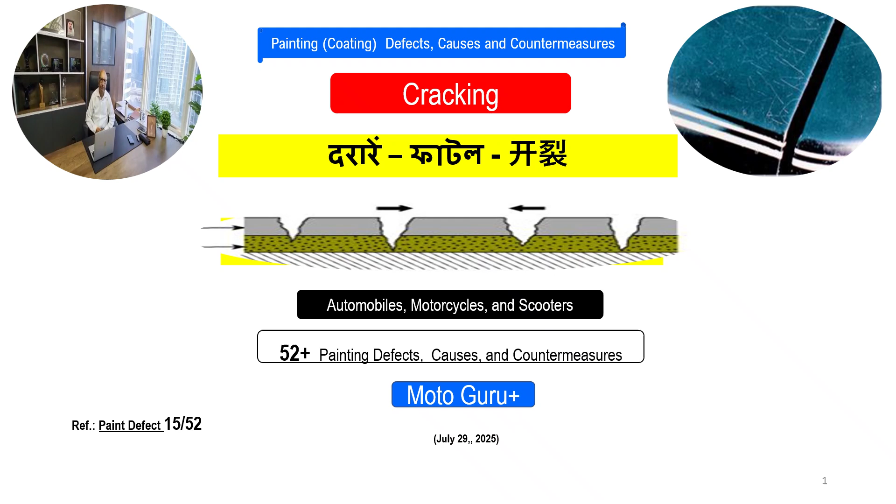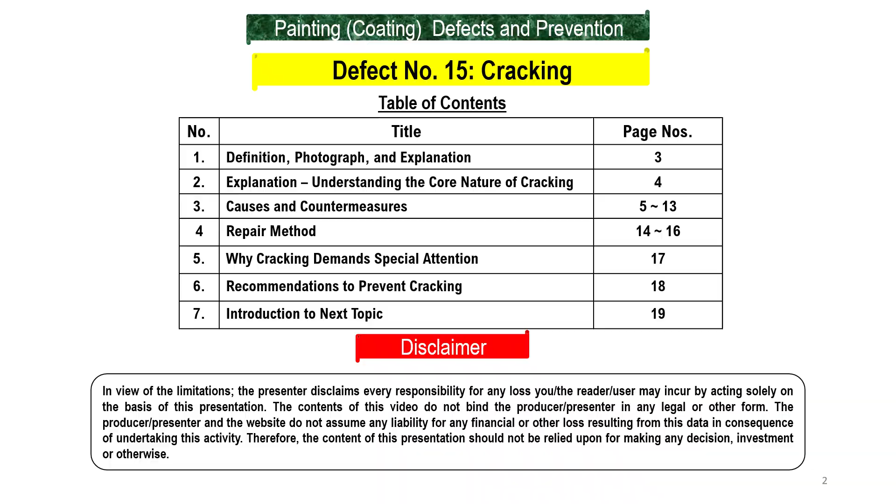Cracking is a surface defect characterized by the formation of visible fissures or breaks in the top coat layer of paint, varying in length and width. These cracks typically resemble dried mud or fractured glass and occur due to the loss of paint film elasticity. Cracking is often a progressive failure originating from underlying issues such as improper curing, excessive film buildup,

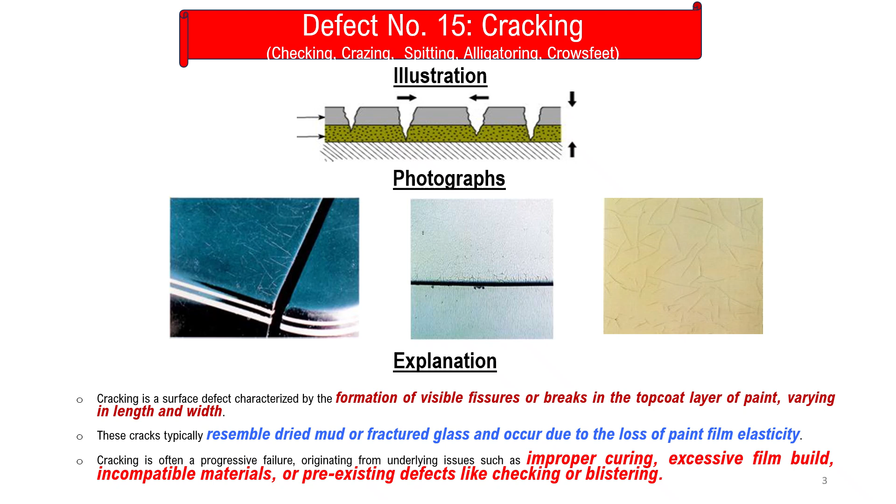incompatible materials, or pre-existing defects like checking or blistering. Cracks are lines of various lengths and widths in the top finish, resembling the cracking of dried mud. It is usually the result of an earlier fault, such as checking or blistering.

The paint defect cracking is one of the most serious and structural failures in automotive coatings. Cracking reflects the loss of elasticity and cohesive strength of the paint film. It is not just a cosmetic issue. It indicates that the paint system has either aged prematurely or was compromised during application. Cracks allow moisture and environmental contaminants to penetrate, leading to corrosion and further delamination.

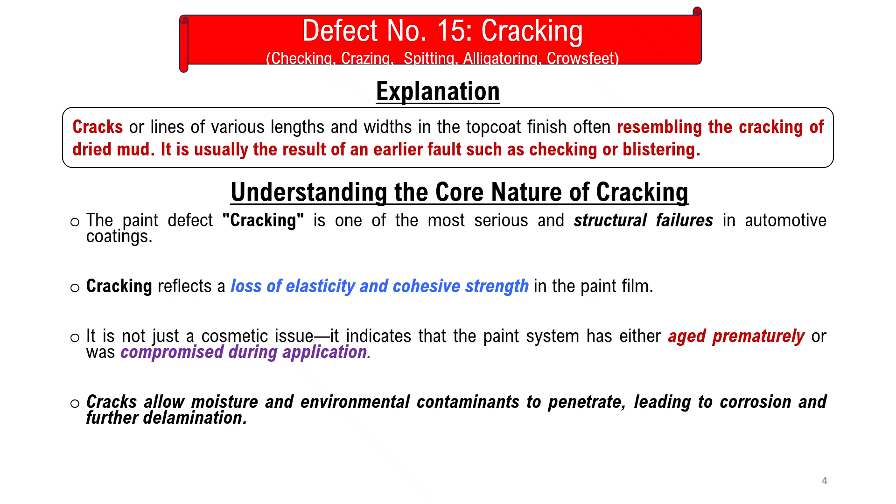Regarding causes and countermeasures, the first and foremost important cause is excessive film buildup, that is excessive film thickness of undercoat and/or top coat. When there is thick film, the thick film layers lose flexibility over time, and therefore they are prone to cracking, especially under temperature stress or vibration. Therefore, we recommend applying coats within specified thickness, following the manufacturer's technical data sheet for number of coats and flash times, and using a wet film gauge to control paint film buildup.

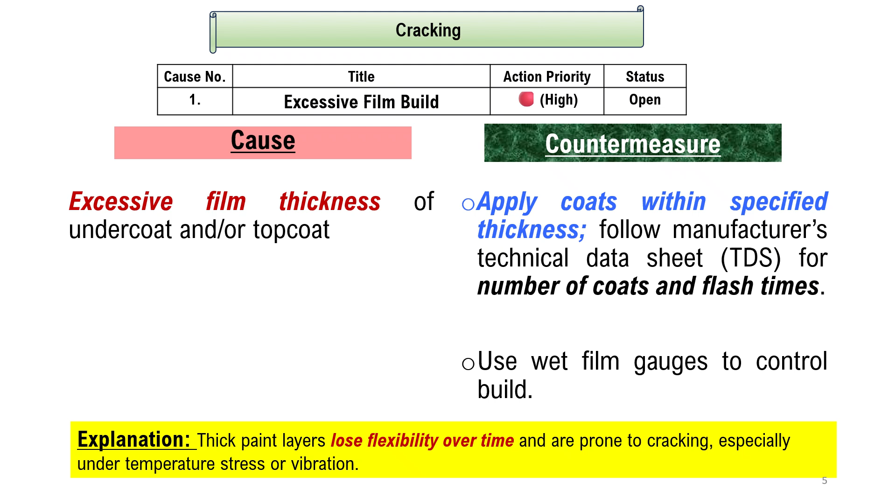Cause number two, a high priority item, could be refinishing over a damaged substrate. Application over previously cracked, crazed, or unstable finishes. Old cracks act as stress concentrators, leading to rapid propagation into the new coating. Therefore, we recommend completely stripping and removing the cracked substrate before refinishing, and checking for stability of existing coatings before proceeding.

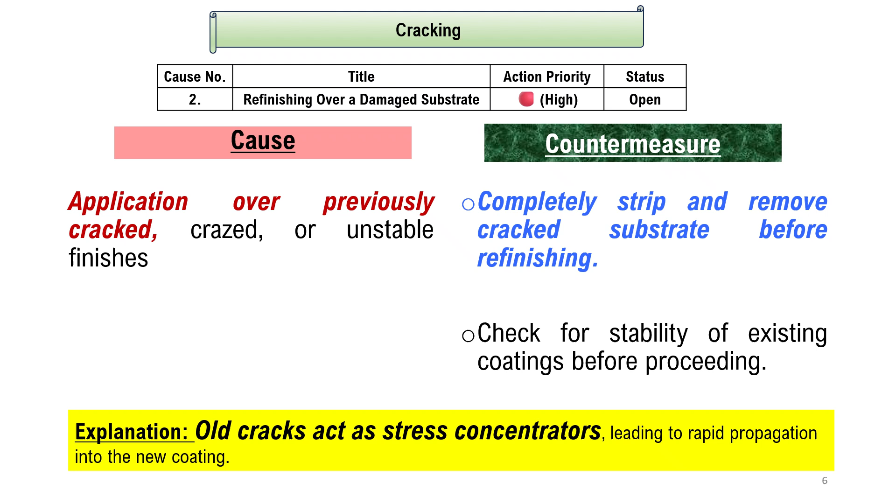The third important probable cause, also a high priority item, could be insufficient flash time, that is, forced drying. Not allowing adequate flash off time between the coats, or drying undercoats with compressed air, etc. In that case, solvents become trapped in lower layers, leading to surface tension and cracks during curing or aging. Therefore, it is recommended to follow correct flash times between the coats, avoid forced air drying from the spray gun, and allow natural evaporation or use controlled booth airflow.

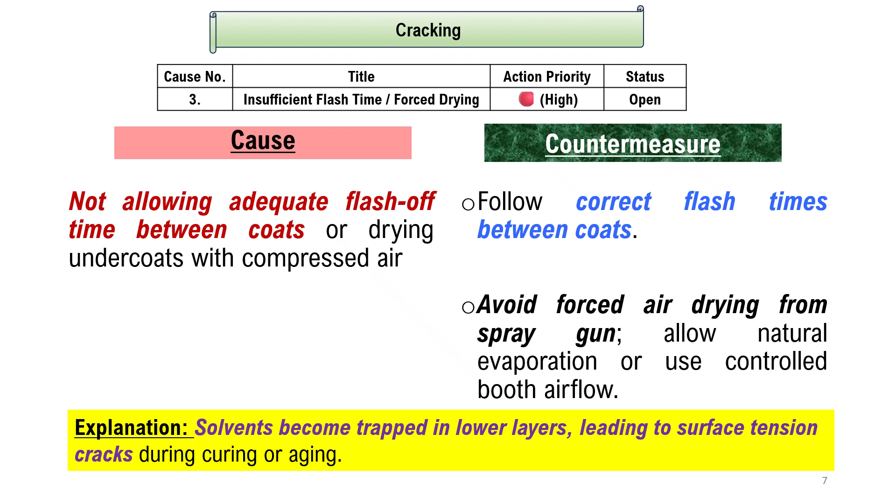The fourth probable cause could be incorrect mixing ratios or excessive hardener. Using too much hardener or an incorrect mixing procedure alters the chemical reaction, causing brittle film formation or incomplete cross-linking. Therefore, it is recommended to always mix paint according to the TDS, that is the technical data sheet, use digital scales or mixing cups for accuracy, and add components in the correct sequence.

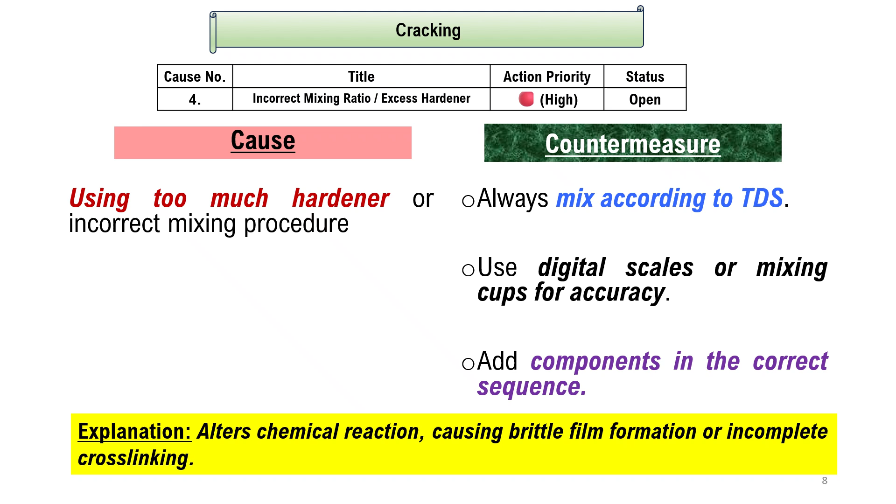The fifth probable cause could be poor material agitation. Paint or hardener not stirred adequately before use. Settled or unmixed components affect the performance and film flexibility. Therefore, thoroughly stir or shake all components before mixing and before spraying, and use mechanical agitators where required.

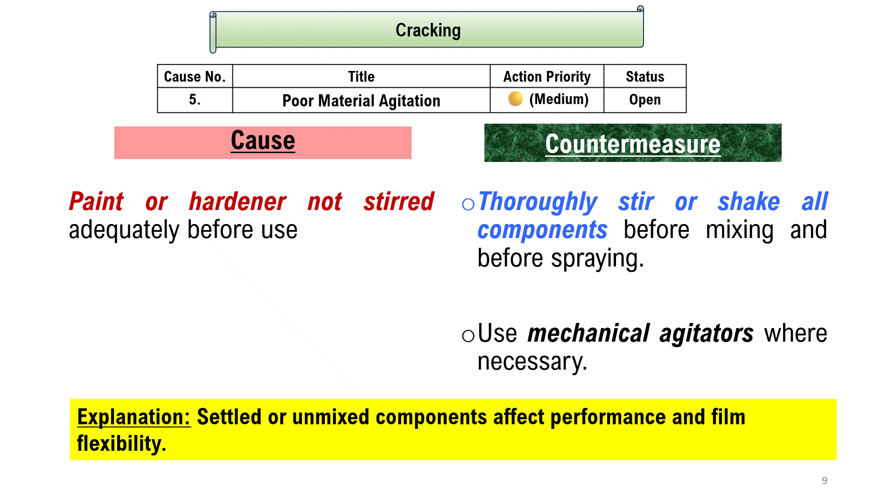Number six, probable cause could be environmental exposure: degradation due to long-term exposure to UV ultraviolet rays, heat, and moisture. UV rays and moisture accelerate aging, making the paint film brittle and prone to cracking. Therefore, use high quality 2K, that is two component system, with ultraviolet resistant resins. Apply clear coats where required and educate the customers also.

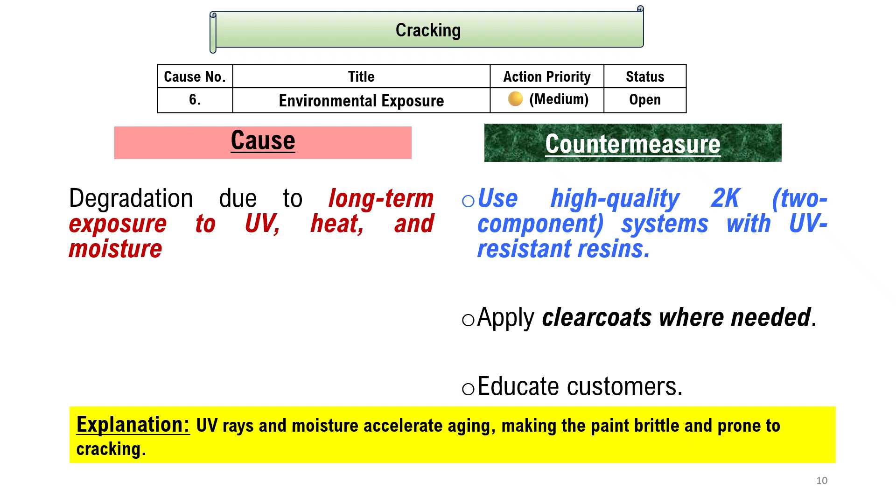Number seven, use of incompatible additives: use of generic reducers, thinners, or hardeners which are not designed for the system. Remember, chemical mismatch leads to improper curing, shrinkage, or film failure. Therefore, always use system compatible additives specified by the paint manufacturer. Avoid generic substitutes.

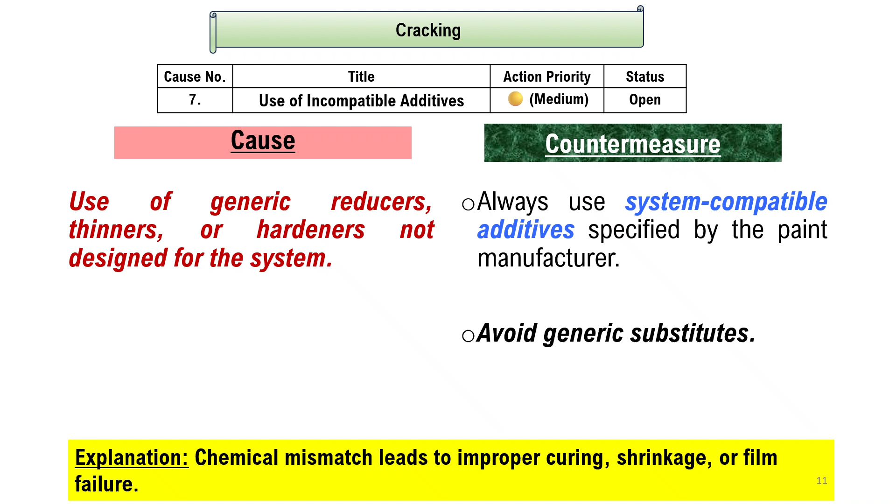Eighth probable cause could be substrate movement or flex stress, cracking from vibration or thermal expansion on flexible substrates like plastic or thin sheet metal. Rigid paints on flexible surfaces crack under stress or vibration. Therefore, it is recommended to use flexible primers and top coats designed for plastics or vibration prone parts. Incorporate flex agents in case it is necessary.

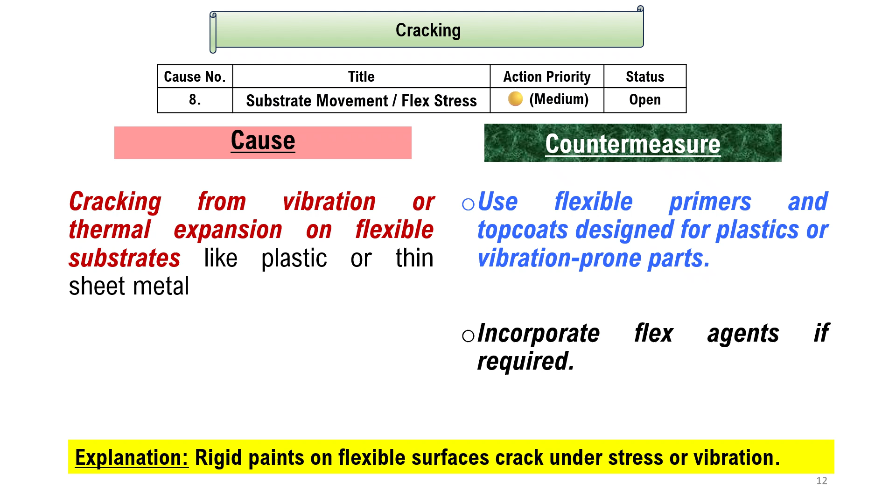Ninth probable cause could be extreme temperature curing, that is baking at temperature above or below the recommended range. Improper curing alters the internal stress distribution, leading to early cracking. Therefore, we recommend curing the paints at the recommended temperature and time duration. Ensure accurate oven calibration and monitoring.

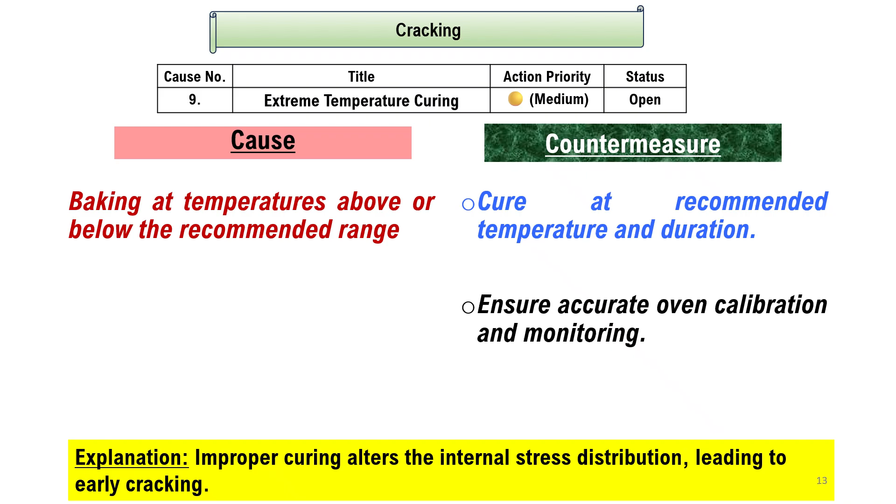Coming to repair method of cracking defect. To start with, identification and assessment: carefully inspect the painted surface to determine the extent and pattern of cracking. Confirm whether the defect is limited to the top coat or extends into the undercoats or substrate.

After this, remove all affected paint layers down to stable and sound substrate. This may require mechanical sanding or chemical paint stripper.

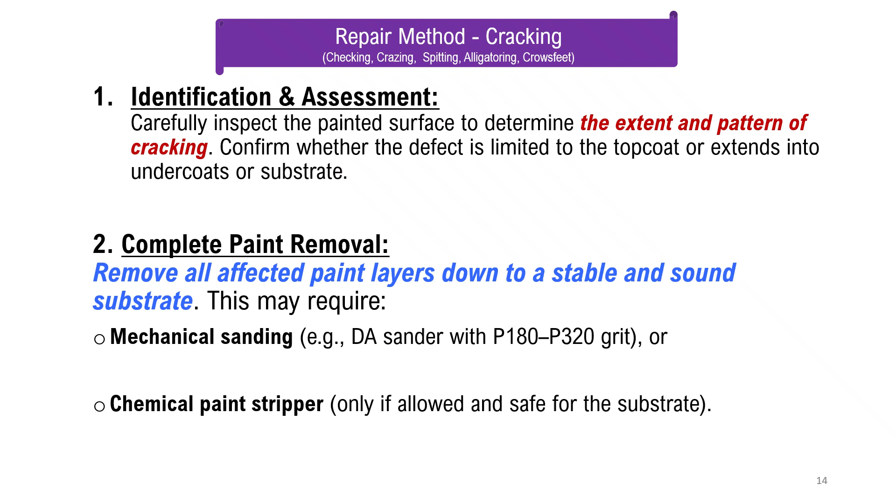Then thoroughly clean the exposed surface to remove dust, wax, silicone, and residues or any other contamination. Use a recommended surface cleaner or degreaser. Thereafter, feather edges surrounding areas for smooth blending. Apply suitable primer or surfacer if bare metal or plastic is exposed. For plastics or flexible panels, use flexible primers and adhesion promoters.

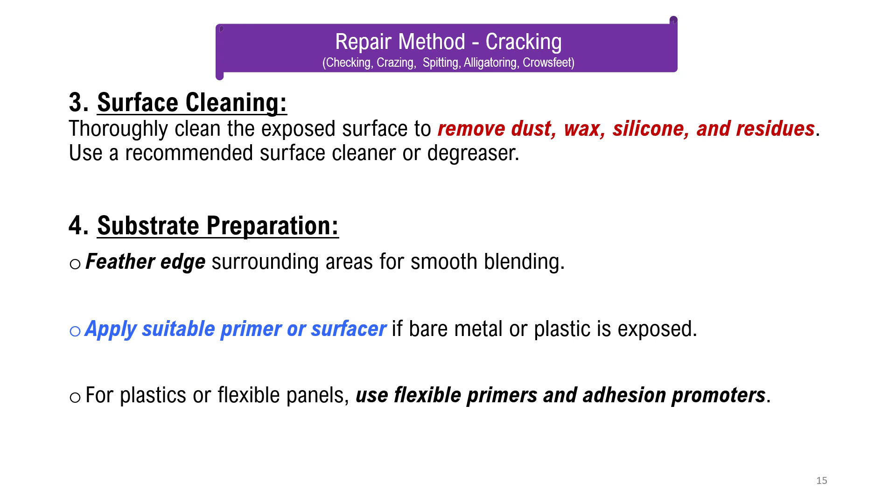After that, repainting is done. Apply undercoats and topcoats according to the manufacturer specifications. Ensure proper flash time, mixing ratios, and film thickness. Use system-compatible hardeners, reducer, thinner, and any other additive. Bake or air dry under controlled conditions. Finally, after full curing, inspect for defects. If required, sand and polish the area for gloss and texture match.

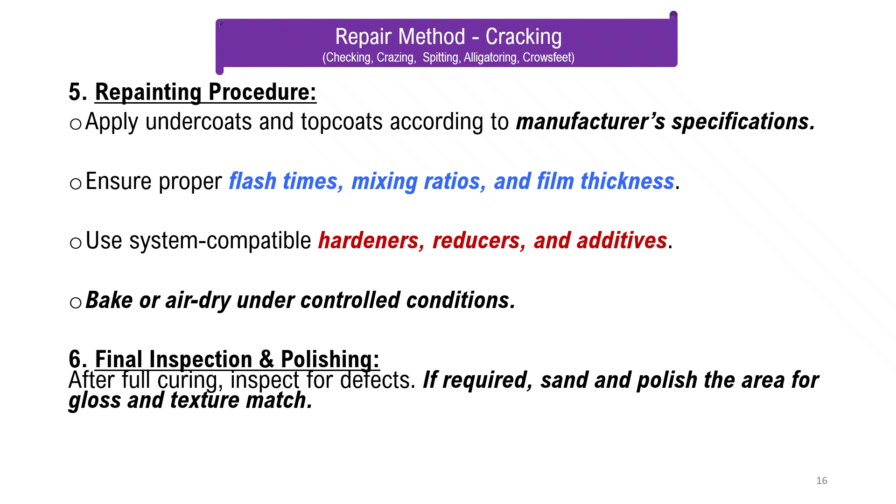Now just a brief note on why cracking demands special attention. Because the damage is irreversible. Unlike surface defects like dust nibs, or minor orange peel, cracking cannot be spot fixed or buffed out. It always requires full stripping and repainting.

It usually arises from systemic errors like incorrect layering, mixing, or drying, not just one-off mistakes. It's highly visible. Cracks, especially mud cracks or spider web types, are easily visible to the customers and reflect poorly on the finish quality.

Failure in harsh environments: automobiles, motorcycles, scooters, and auto rickshaws often face intense sunlight, rain, and vibrations, accelerating cracking if the system is not perfectly balanced.

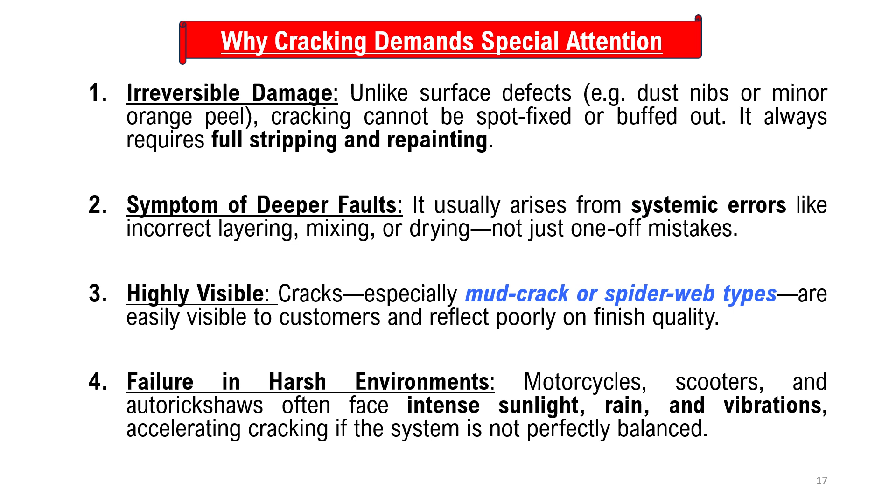The recommendations to prevent cracking: Number one, always control film thickness. Measure it, don't guess it. Respect recoat windows and flash times, especially in multi-layer jobs.

Use compatible OEM-specified materials only. Avoid mixing brands or generic substitutes. Educate painters about mixing sequence and ratios. Many defects begin in the mixing rooms. Include periodic training and climate controlled curing. Inconsistent booth temperature or humidity contributes significantly to the effect of cracking.

Cracking is a warning signal, not just a flaw. It implies the entire painting process, materials, equipment, climate, and technician habits should be audited immediately.